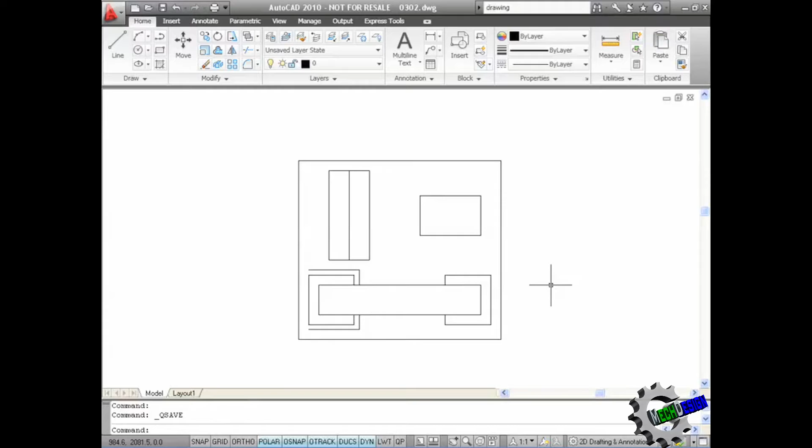We're going to have a look now at dynamic blocks within AutoCAD 2010. The interface for creating dynamic blocks has been enhanced and changed slightly. However, dynamic blocks still follow the same process they have since AutoCAD 2006. So let's have a look at our objects here on the screen right now.

What we have is a group of lines. As you can see, they're all separate lines that form an image of a telephone and its handset. So what we're going to do is make that into a block.

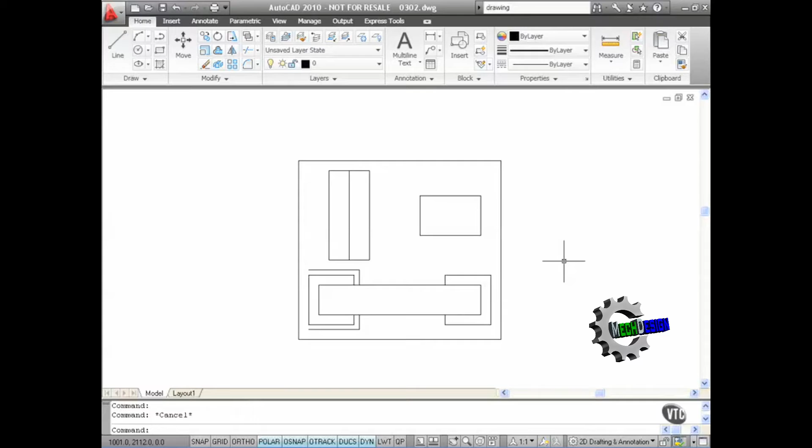Blocks are extremely useful. They are basically content reuse within a drawing. So once I've made this into a block, I can reuse it over and over again in this drawing. I can export it out to another drawing as well if I want to. I can also make it dynamic and apply dynamic parameters to it, to make it do things when I insert it as a block into the drawing.

So let's make this into a block. Now we've got the block panel here, which is on the Home tab. I've got either Insert, and you'll notice I've got Create, Edit, or Single. With Edit, I can edit attributes in a block reference.

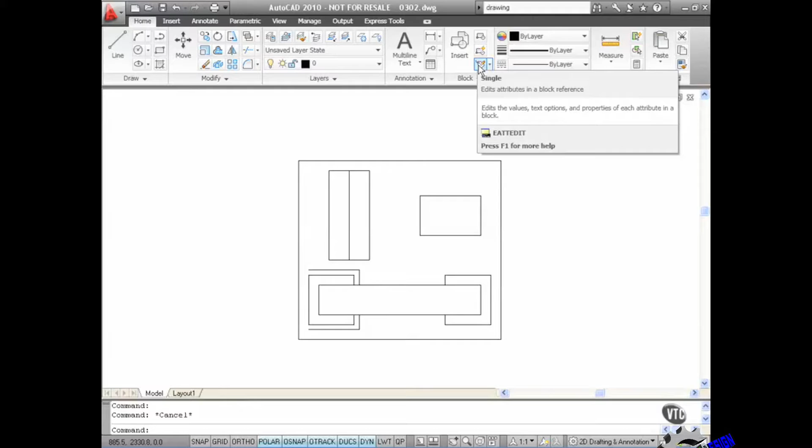We're not going to cover attributes in this Quick Start course. They will be in the 2D Basic Concepts course for AutoCAD 2010. So I need to create a block.

So I click on Create, and the block definition dialog box appears like so. Now, imaginatively enough, we're going to call it Phone.

Now what I have to do is set all of the settings for this block. The first thing I need to do is specify a base point here. There's the base point just there. I click on Pick Point, and I'm going to use this top corner here to specify the insertion point. I hover over the endpoint, snap with the object snap there, and left click. As you can see, it now has X and Y coordinates for that base point.

Now those X and Y coordinates are not fixed. What we've done there is select the corner of the phone to insert it into this drawing or any other drawing. I now need to select the objects that are going to make up the phone, in the Objects part of the dialog box.

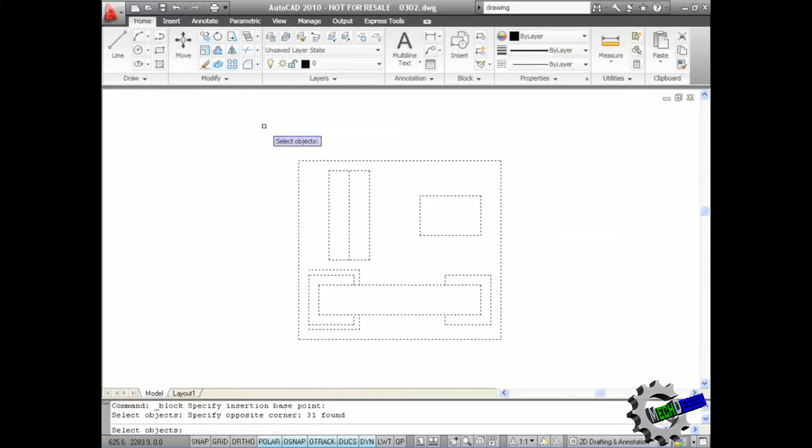I'm going to convert the existing objects into a block once I've selected them. Notice no objects are selected right now. I click on the Select Objects button here, which takes me into the drawing. I'm going to do a quick crossing selection window with two left clicks like so, and it selects all of the objects. I press Enter to confirm, and as you can see in the dialog box now, I get a little preview, and it tells me I've got 31 objects selected.

Annotative behavior we're going to ignore - we cover that in the Basic 2D Concepts course. Scale uniformly though is useful; that scales uniformly in the X and Y direction when you use the scale command on a block. And always with blocks, allow exploding - you can explode the block back to its original objects using the explode command.

You might want to explode this block, make some slight changes, and save it as a different block - perhaps a slightly different handset, for example. The block unit is millimeters, since it's a metric drawing in this case, and there's an option to open in the block editor. I'm going to tick that box because I want to show you the block editor for dynamic block editing. I click OK now.

The screen changes and I go into a different area, so to speak. I'm not actually in the drawing anymore - I'm actually in, as you can see from the tab at the top there, the Block Editor.

You'll notice these are color coded. You get a sort of olive color for the block editor now, so you know where you are. They're all color coded now, which makes life so much easier. And what you've got here is your block authoring palette.

Now this particular block, I'm going to apply a flip action. Before I apply a flip action though, I have to apply the flip parameter. So I go to the parameters tab here, click on it, and as you can see there are various options available, and there's my flip parameter option there.

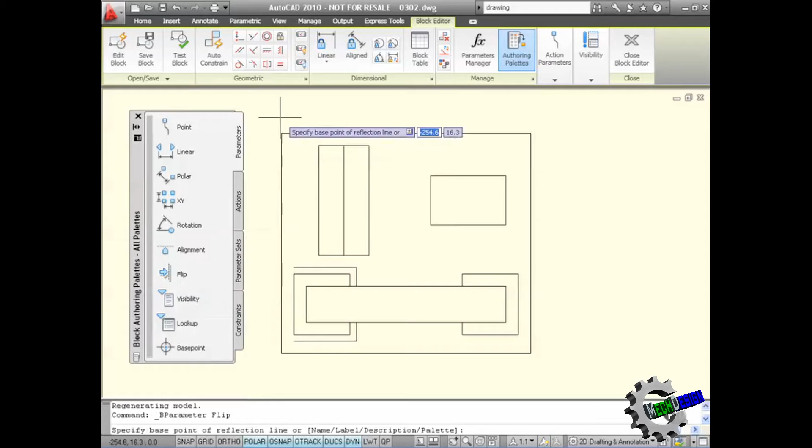I click on it on the palette, come into the drawing area, and it asks me to specify the base point of the reflection line. A flip is like a mirror command. So I'm going to go from there, left click, to there, left click. That is where I'm going to flip along that edge of the phone.

Now you'll see I've got a label there. I'm just going to place that just to the right there. It doesn't matter where it goes because you'll only ever see it in the block editor, you won't see it on the drawing. We get two little icons appear - there's our flip icon, and we get a little exclamation mark.

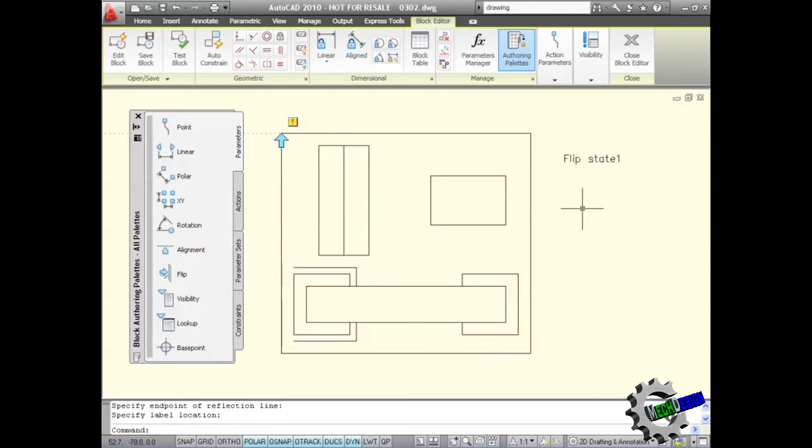Now the reason we've got that is we haven't selected the objects that are going to perform the flip action. So we go to the Actions tab now, select the flip action here, come into the drawing area again, and it asks you to select the parameter.

Now I can select the line, I can select the exclamation mark, or I can click on the text for the flip state. Doesn't matter which, all of them are part of the parameter. So now once I've selected it, it goes select objects.

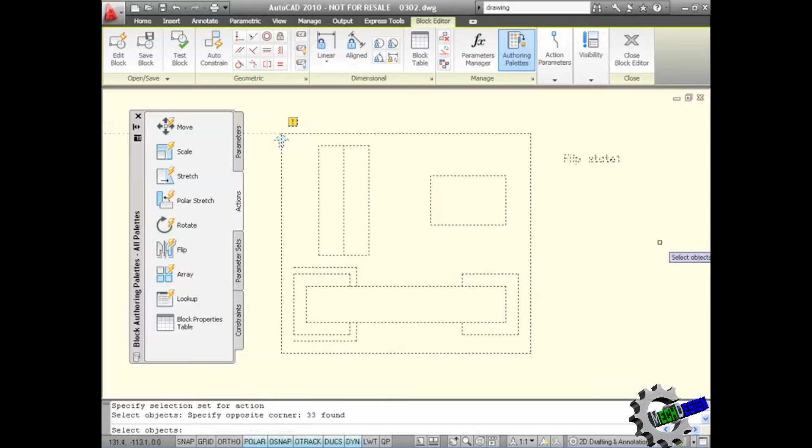We need to select everything, so left click down here, crossing window selection, left click again, selects all the objects, press enter to confirm, and you'll see now there's our little flip action. These have changed now in AutoCAD 2010 - you get an icon now instead of text like the flip state, telling you you've got a flip action there.

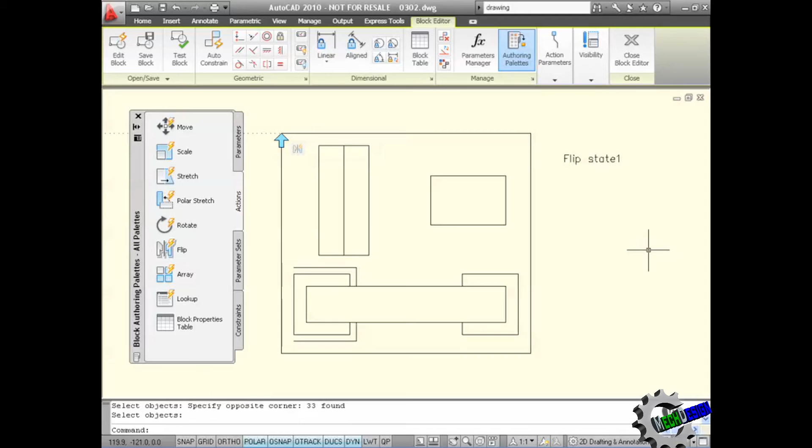Now everything is done. Now what I want to do is save the changes to the block, go back into the drawing and test the block. Well, AutoCAD 2010 now has a test block option, so it opens a window to test the block. I don't even have to test it in the drawing itself, I can test it separate to the drawing.

So I click on test block, takes me into the test block area. If I click here, like so, there's my block, there's my insertion point for my block that I selected earlier, there's my flip action there. Click on the flip action, and as you can see, it works - it flips the phone from left to right, like so.

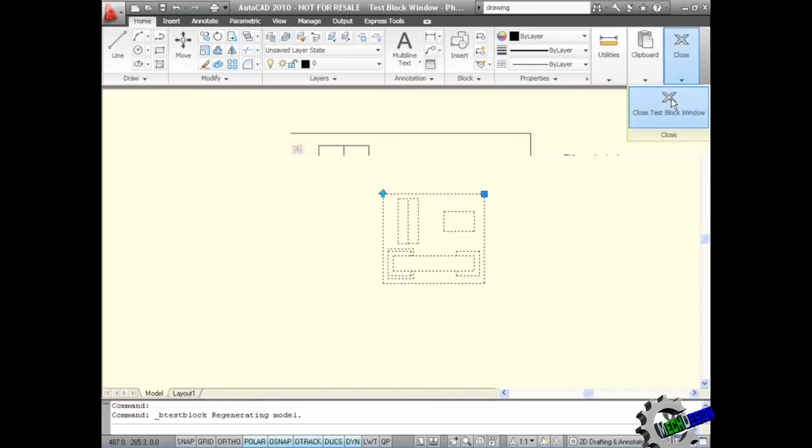So I can now close my test area here, test block window. Takes me back into the block editor. If I click on close again now, it'll prompt me, do I want to save changes to the phone block? Yes, I do. So I save the changes by clicking here, and I'm now back in the drawing. It looks exactly the same.

It's not. Let's just zoom out slightly and pan a little bit. If I click on that block now, there's my flip action, and it works in the drawing as well because I've already tested it. This is a nice little feature as well in AutoCAD.

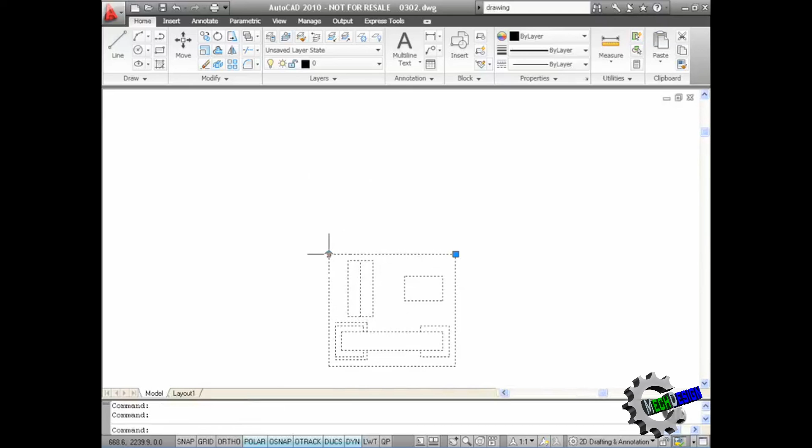If you've got a block and you've given it a base point, it places a grip on that base point, and I can drag the block around. I can place it anywhere I like in my drawing. Isn't that easier than trying to move all those lines around that originally made up that phone?

Content reuse and dynamic blocks - fantastic in AutoCAD 2010.